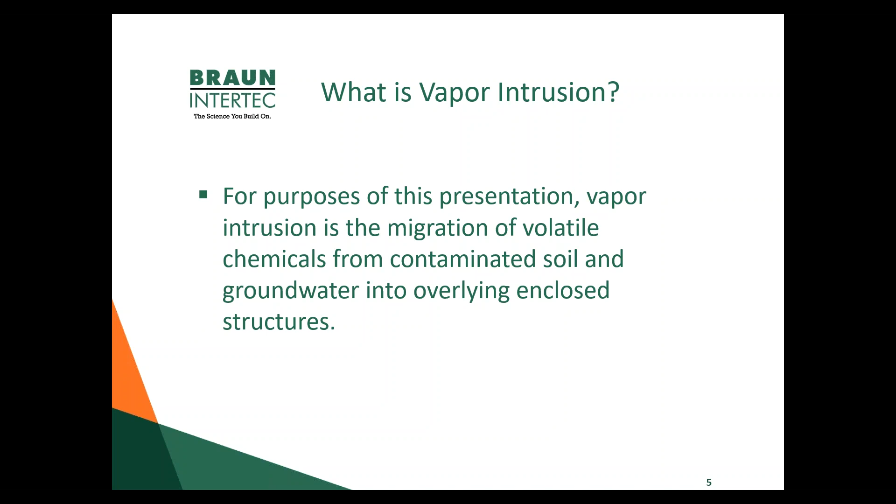So what chemicals are we concerned about? I'm going to call these the usual suspects. If you're involved with environmental consulting, you know these are the compounds that can be most problematic on many of our sites. BTEX compounds have been a thorn in our sides for decades, from leaking underground storage tank sites. Trichloroethylene, or TCE, is a very common degreasing solvent. We see it on a large percentage of our commercial and light industrial properties. With regard to vapor, TCE is particularly problematic because it is a carcinogen and has very low inhalation targets, so it's often a driver when it comes to mitigation requirements on vapor intrusion properties.

Tetrachloroethylene, PCE, or PERC, is a common dry cleaning solvent. Everyone's heard of that. Even though today dry cleaners are migrating away from PERC to more environmentally friendly solvents, we still have a legacy of thousands of historical dry cleaning facilities that used PERC in the 50s, 60s, 70s, and 80s. And we all know about projects where these types of releases from these small dry cleaners have created a lot of problems.

And then in addition to these larger quantity VOCs, we have all types of other cleaners such as carbon tetrachloride, methylene chloride, MEK, a paint stripper. These are found in a number of products and can be found in contaminated soil and water.

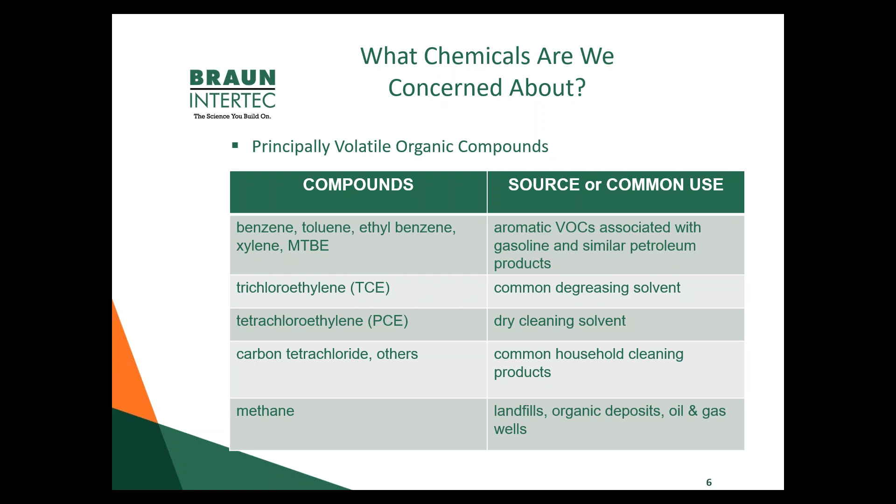And methane, which has been an issue for quite a long time, typically associated with landfill gas, but we have also had projects very recently where organics, for example, from a buried pond that was filled in were degraded, and the organics created sufficient methane to be a problem in an overlying proposed structure. And also oil and gas wells, improperly sealed oil and gas wells can allow methane from very deep strata to migrate up to the surface and affect overlying structures.

So a brief conceptual model for mechanisms of vapor intrusion. The source area is often contaminated soil, contaminated groundwater, sometimes separate phase product that we call NAPL. And the concept is that these volatiles will volatilize and rise up through the soil mass into an overlying structure, kind of like hot air. In reality, we know this is a simple model that helps us get our heads around what might be going on, but we know that in truth, it is much more complex.

There's lateral movement in the subsurface due to layering, sedimentation of soils, presence of impervious clay layers that might inhibit or push migration of volatiles off to the side, presence of cracks or fissures in desiccated clay layers, which are found commonly, and the presence of utility conduits, which are lateral or linear features that are often backfilled with pervious material and can allow VOCs to migrate great distances from source areas. So these are all complications in the vapor intrusion conundrum, and things that we have to deal with, and we'll be talking about a little bit.

So, Frank, sometimes these soil contaminants, the VOCs underneath - let's say when they were building those houses, you know, there may not have been a vapor intrusion when you have done a test and they say, hey, there's no vapor intrusion, and then all of a sudden, because it takes time for that vapor to come up, have you seen that? Sure, and contamination migrates, as we know. Groundwater can migrate, does not respect property boundaries, so it could migrate from an adjoining dry cleaner or gas station to the nearby residential neighborhood. So it might be something that could take years to migrate, and therefore you wouldn't know it. And typically for residential developments, you would not be testing for this type of issue. Typically only happens on commercial developments.

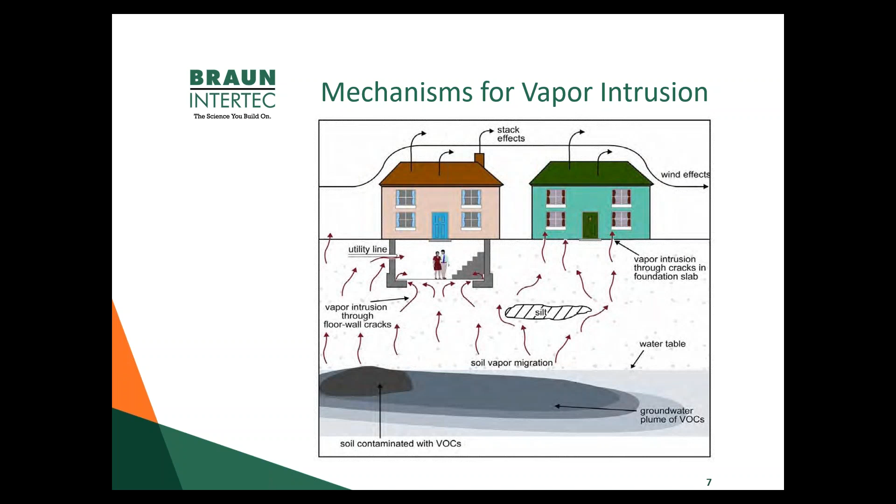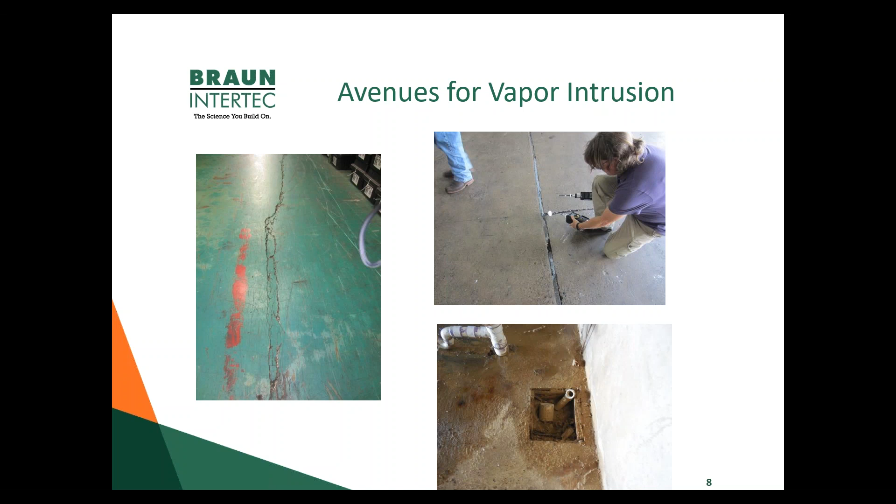Frank, this is Chris, and we recently did a test on a building with a smoke pen, and you can literally see the intrusion of air into the building space when the building HVAC systems are operational. Yeah, so it's very evident in some cases. That's a good example of a picture being worth 1,000 words - to physically see the smoke migrating into your space really tells the tale.

So why has vapor become such a big concern? If you think about typical contaminant investigations, we're looking at soil or groundwater, and we have to have a contaminant in a media and then an exposure route to a receptor. So in the case of a typical investigation, you have to drink or ingest contaminated groundwater, or you have to come into contact with contaminated soil, or perhaps inhale vapors or inhale dust from contaminated soil in order to have an exposure.

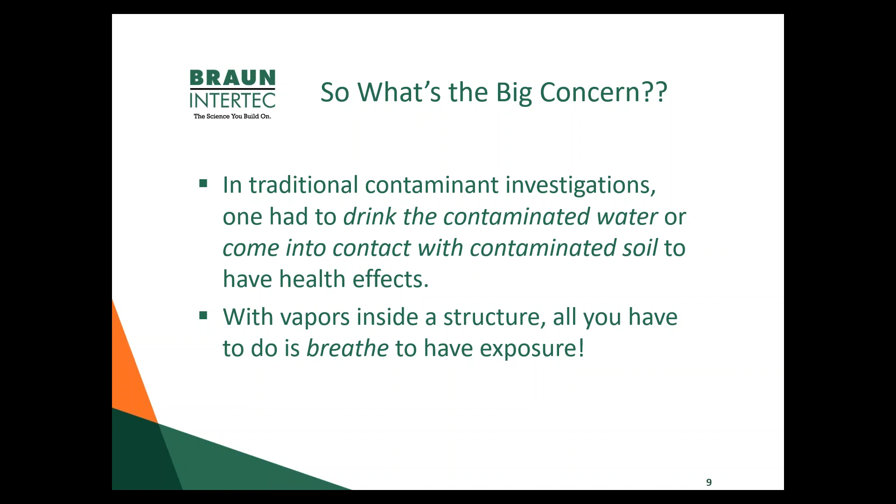So there's a process from the source to the receptor that must occur for there to be a risk. With vapors, we have a unique situation: if there are vapors within a structure, and you are breathing—which we all do many times per minute—then the exposure route is complete. So it's an immediate exposure route, and can be really problematic because of the ingestion of volatiles into your lungs. Yikes. So what are some of the difficulties?

I'm not going to go through these bullets one by one, but there's lots of variation in subsurface conditions, which is a problem we deal with on all types of subsurface projects, geotechnical or environmental. The nature of the contamination will vary—what chemical is it, how concentrated, how deep is it in the soil, what's the stratigraphy, et cetera.

Another factor is that buildings are constructed using a wide variety of protocols depending on when they were built and for what purpose. A building built in 1950 wouldn't have the airtight concerns we have in LEED-qualified buildings in 2020, which are often airtight and built to keep HVAC costs low. All of those factors associated with different building types will dramatically affect the opportunity for vapors to enter the structure.

And then we have preferential pathways, which are a real troublesome aspect of many of these sites—small linear features, like sand used during backfilling or installation of shallow utility trenches, that can become pathways for vapor to enter a structure.

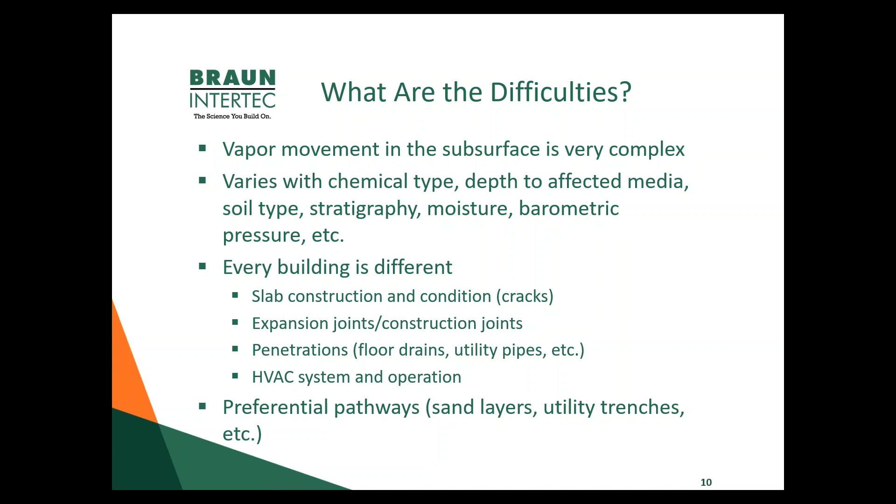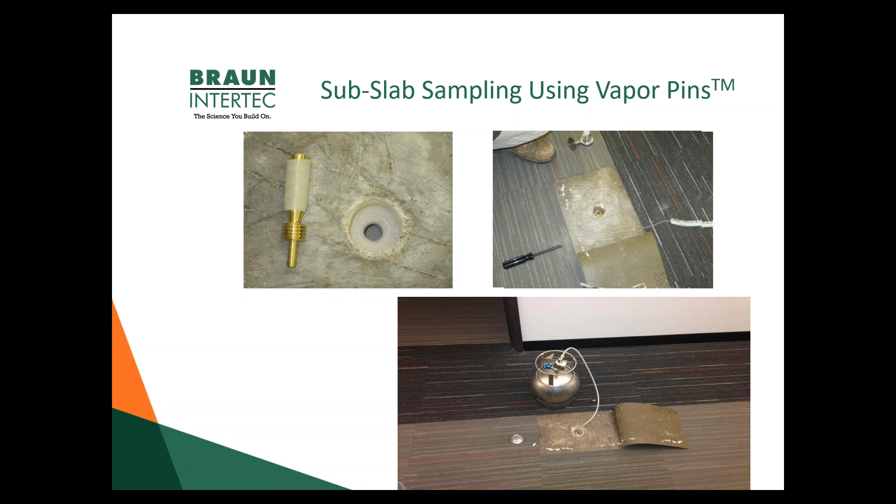The beauty of this installation is it's very low disruption to the tenant. We just pull back a carpet tile, drill a hole, put in our pin, add a flush cover, and flap the carpet tile back down—no one even knows we've been there. So for occupied buildings, there's a mechanism to get sub-slab vapor samples without disrupting the business or tenant, which is a big deal for some clients.

Going from sub-slab to indoor air—once there's a potential for vapor intrusion, indoor air sampling is a logical next step, and gives the best indicator of whether volatiles are entering at problematic levels. We can compare those indoor air levels to criteria established by state or regulatory authorities.

We have to be careful that indoor air sampling can vary seasonally and due to many variables—atmospheric pressure, even over the course of a day. Studies have shown concentrations of TCE, for example, varied by a factor of 5 over just half a day using continuous air monitoring. So a lot of things can complicate our assessment of vapor, and background issues also come into play.

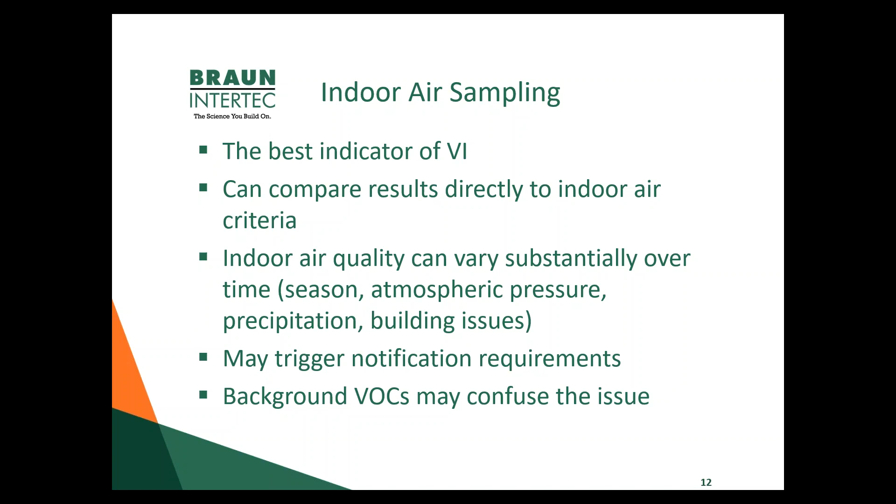If we go to the next slide, we'll show some sources of contamination. We probably all have a closet in our laundry room or garage like the one in the upper left, filled with chemicals for routine cleaning—pesticides, cleaners, aerosols. Many contain VOCs that can result in detectable concentrations in ambient air. For dry cleaning, multiple studies have shown that recently dry-cleaned material in a single family house will result in detection of dry cleaning solvents in the air.

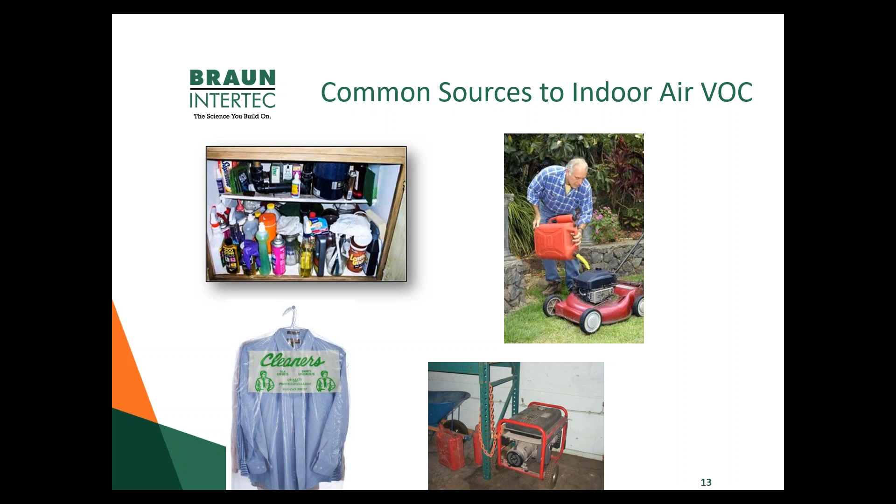And then gasoline used for lawnmowers or generators—studies have shown that even a gasoline can sitting in a garage adjacent to a single family structure results in evidence of BTEX within the air in that home. So all complicating factors that make the job just a little more challenging.

Yikes. So now I think we have a quick poll that's kind of fun to see what people's thoughts are regarding vapor. What percent of the time would you expect to find potentially harmful VOCs in a structure? This would be just detectable concentrations, not above any regulatory threshold, but just detectable by lab analysis: 10%, 25, 60, or 80. So I think—have we launched the poll? Okay.

And while people are voting, I thought I'd point out those slides you showed are somewhat applicable to single family homes, but in reality, commercial and industrial facilities all have this very similar potential of indoor VOCs. Absolutely, yes.

10% of our audience said it was 10%. We had 33% say it was 25%. 38% said it was 60%. And 19% said 80%. Oh, all not right. Too bad.

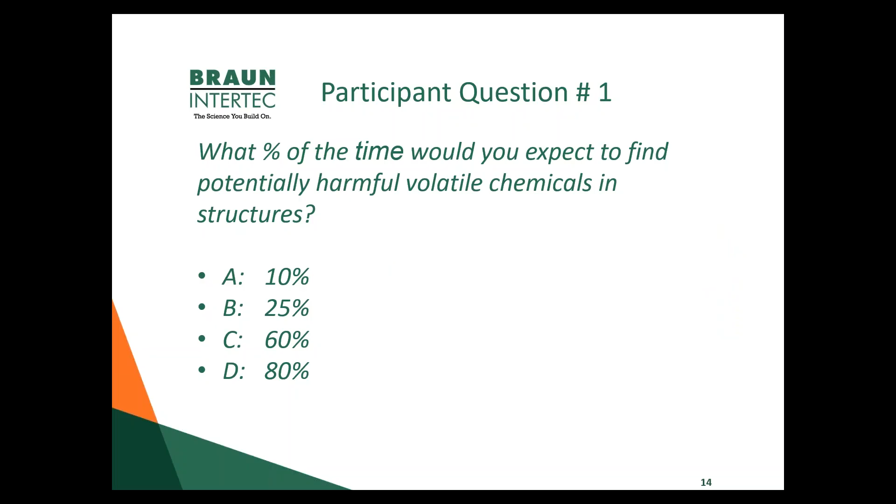Well, here's the results of some studies. If we go to the next slide, this is my last slide. EPA did a study and reviewed 18 indoor air studies across many states. This is a while ago, but still, I think, applicable. They found that over 80% of the studies reported the presence of BTEX in indoor air, whether that was from an actual vapor intrusion issue or due to ambient contamination. I'm not sure they concluded, but that is a surprisingly large percentage.

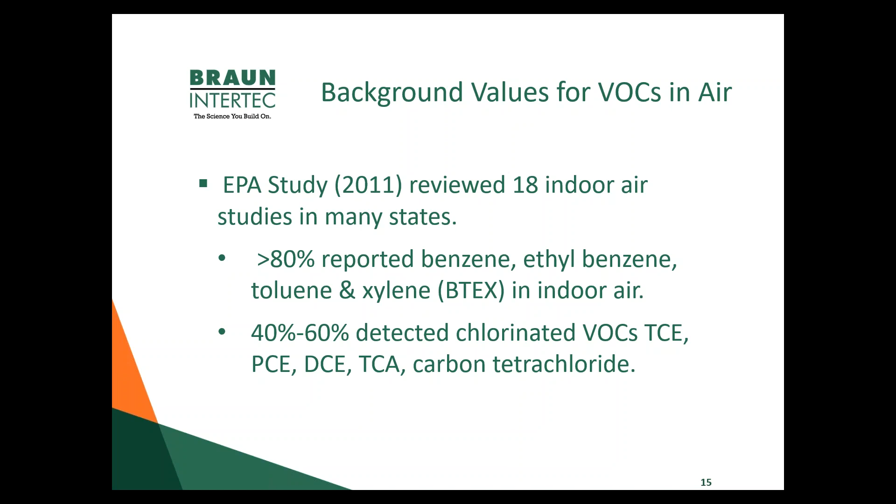So kind of amazing, and 40 to 60% detected one of the chlorinated VOCs in indoor air. Again, a very large percent. So when we're doing vapor studies, we need to consider background concentrations as part of the process. So with that, I'm going to turn it over to Chris, who is going to share some of his experiences and discuss the challenges associated with mitigation design for vapor intrusion.

All right, well, thanks, Frank. So what I want to cover is an overview of mitigation alternatives that exist out there, discuss a little bit about the design and construction process for mitigation, and just show some information about the components of mitigation alternatives, and in that process provide some lessons learned that we've found over the years.

And I start out with this slide, remediation versus mitigation, partly because people mix up the terms and get confused by what they might be required to do. As a responsible party to a contaminated site, you may be required to remediate the source of VOCs, and in the process you may also need to have some mitigation of the building. Typically you can do both at once with the same system. We have that kind of systems in place.

But as a voluntary party or neighbor to a contaminated site, which now has migrating vapors onto your site, you may just be mitigating. Mitigating means you're just trying to cut off that exposure route in the sub-slab area of your building, or even to the sides of a basement of your structure. Again, cut off the potential for that intrusion, maybe blocking utility corridors, or putting in some other type of mitigation system.

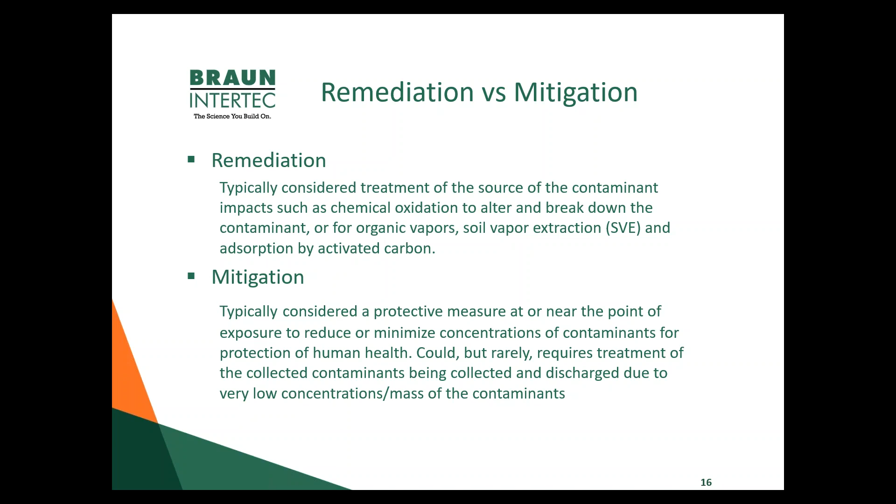So next slide. Depending on what regulatory program you are in, what state you're in, and so forth, generally there are 5 main mitigation alternatives that you may have a selection of. There are variations on these, but generally they're a passive barrier system, maybe an active subslab depressurization, or an active subslab ventilation system, and there's a minor difference there.

Other things that have been looked at are trying to modify your building, pressurize it to reverse the potential for intrusion to occur, or repairing your floor, filling those cracks that Frank showed earlier, and blocking utility entries into the building. As I indicated in last month's blog about vapor intrusion, those two steps can prove to be quite difficult. So I'm going to focus today mainly on those top 3, and for the most part talk about commercial and industrial buildings, but they very well apply to other types of structures, especially multifamily housing, maybe mixed commercial and housing, which there's a lot of these days.

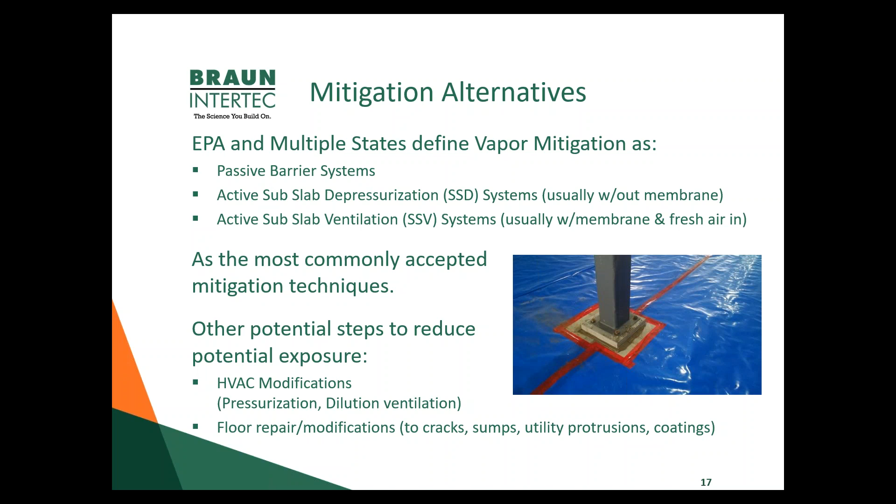So the idea behind those three main alternatives, as I show here, is a passive barrier system just to block that exposure route. You're not trying to collect the vapors that are below or to the side of that building, but you just have this physical barrier through which those chemicals can't pass.

You can think of it like a vapor or water barrier, which sometimes are used and called out in building codes for buildings. But I would point out that a vapor barrier called out in a building code in an occupied portion of a building usually is a very thin plastic membrane, maybe 6 mil thickness, and doesn't typically work.

Depressurization system versus ventilation system - generally the difference is that a subslab ventilation system has added to the design a permeable ventilator, also allowing fresh air into that system. We'll get into that in a bit, but other than that, they're both active systems, essentially pumping air from beneath the structure and sometimes to the sides and discharging that air to the outside.

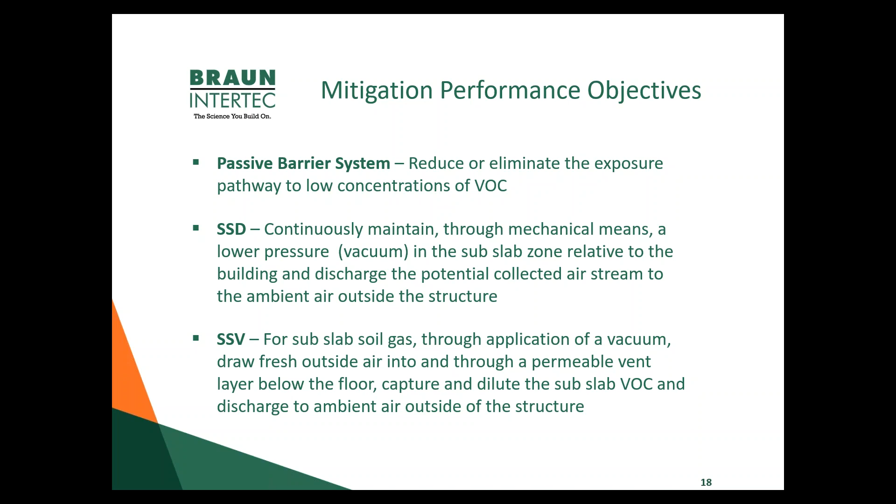I'd point out that in the state of Minnesota recently, now part of a guidance document in the state, another alternative is the addition of a parking structure for vapor mitigation. In the past, it was assumed to be a valid alternative - you've got an underground parking structure, that's going to block the vapors from getting into the office or apartments or condos above. It was found, however, that is not the case. So parking structures now with certain design and construction modifications are allowed.

We're very familiar with this because we here at Braun actually developed this document and did quite a bit of research, and we had some principal architects on staff very familiar with how buildings are sort of living, breathing organisms, if you will. So I just point that out - that's somewhat of a variation on vapor mitigation alternatives.

So once you're in a scenario where you know you need to mitigate, and different states have different requirements for going through the testing, as Frank was pointing out, you're really designing a system to be incorporated into some kind of building or structure, and you need to get that system thought through, designed, and constructed so it operates as planned. Whether you think it through on a focused feasibility study or not, you're usually going through all of these issues in some form.

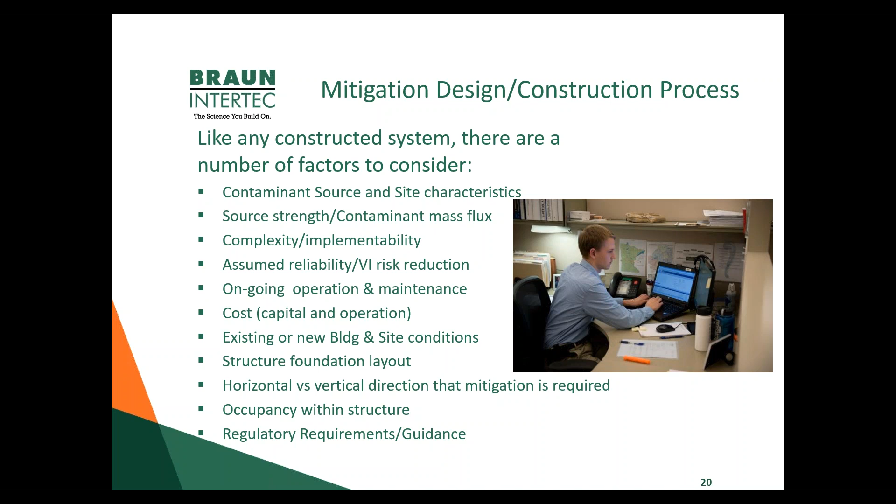But you go through this process and come up with a plan for mitigation - it may be just a barrier membrane, a depressurization system, or a ventilation system. Again, certain regulatory programs don't allow just a straight vapor barrier membrane. Here in Minnesota, for instance, as a standalone mitigation alternative, those aren't allowed.

Overall, the whole design and construction process is there to make sure you're selecting what's appropriate as an alternative, that you're designing and constructing it so that in the end, when you have to test that system or operate and monitor it, it's working as hoped. Depending on the system, this may be a very minimal effort, but it can be much more complicated, with many pages of engineering plans and specifications laid out, and a construction contract for the contractor or contractors building this.

In many locations, you have one contractor placing piping beneath the floor and a plumber doing any plumbing of piping above the floor, having to do with union rules and who can do what.

So the overall process, if you will, is to come up with a basis of design. What are you trying to do? What should this system look like? How are you going to construct it? How are you going to test it? It's permitting requirements and long-term reporting.

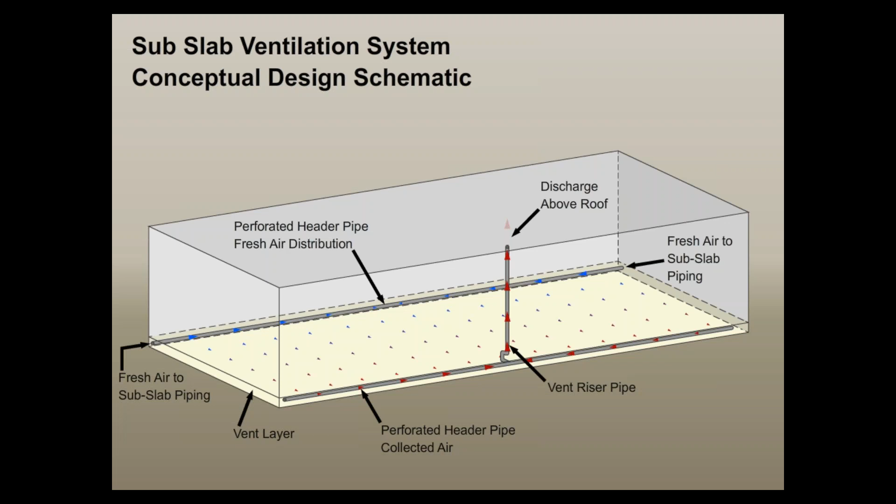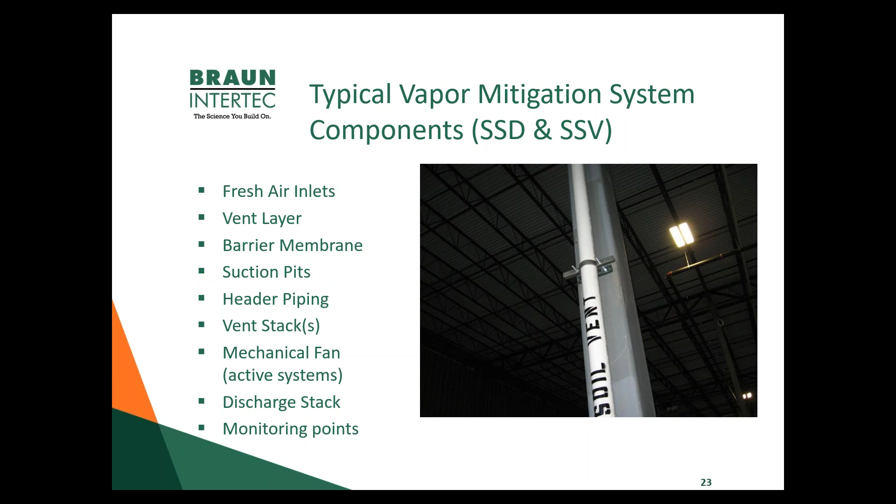There are a lot of components to a depressurization or ventilation system, and it's the design and construction of those things that makes a system successful. That's where we've learned lessons over the years about what works and what doesn't. I listed all these components, not in any particular order of importance, but I'll go through some photographs of these systems and point out some issues and lessons learned.

There are sprayed-on membranes and rolled membranes. Typically the rolled membranes are 15 or 20 mil thick, and a spray-on membrane might be closer to 60 mil thick. This could be a passive barrier in a building, and we can do this in existing buildings or new buildings. Existing buildings, however, is a fairly unique situation where that happens.

But we've been involved in a couple of cases where that has happened, where the entirety of the floor of the building was being taken up. In the case I'm thinking of, they were lowering the basement floor to create greater headspace in that basement room, so we were able to put a membrane in after the floor was removed.

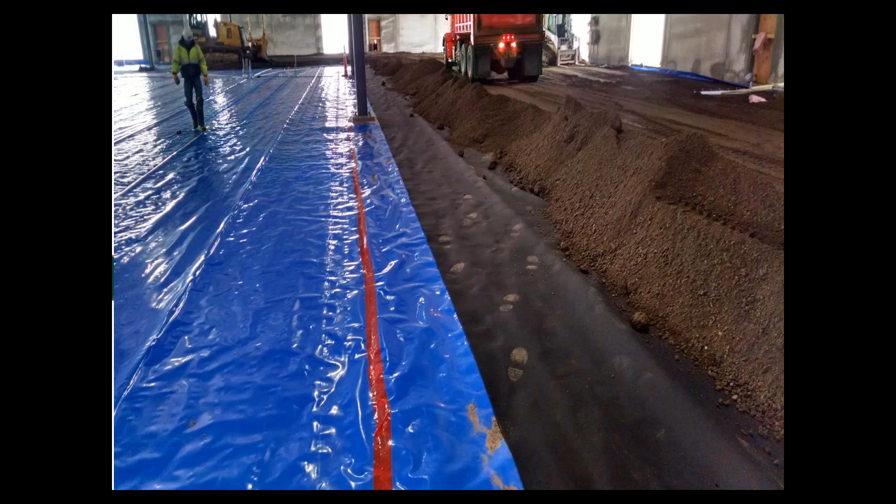The next slide shows the same kind of setup, with the sealing of the membrane. In this case, there's a textile felt material being placed over the membrane because the aggregate base for the new floor of the building is being placed right over the membrane.

We've done some tests and found that aggregate base, because of the sharp rocks—in Minnesota we call it Class 5, in Illinois it's CA6, an aggregate base that goes by different names coming from Department of Transportation terminology—can damage the membrane. So we put that geotextile material over it as a protective layer. You'll notice a guy walking on the membrane, but the trucks aren't driving on it.

One of the big things through that whole design and construction process that we've gotten pretty good at is meeting with the developer, general contractor, and subcontractors to make sure they're not driving on the membrane or over where the piping might be. We've had to go back by hand, dig up and repair piping that guys were just driving over because nobody ever told them they couldn't. It's amazing what people do if you don't communicate up front.

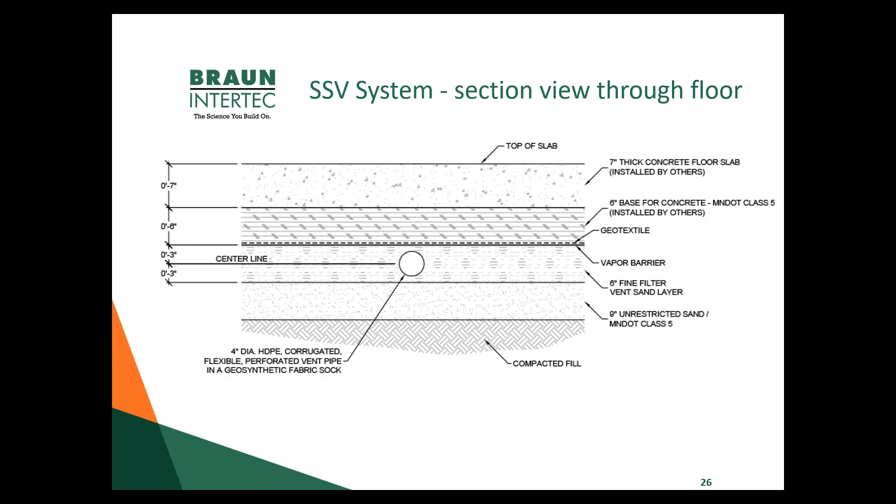Next slide. In many cases we don't have the luxury of building things up, and this was a site in California where the client did not want to expend the cost of bringing more soils in. So we went to a very thin vent layer and a flat pipe. If you don't know what a flat pipe is, it's typically about an inch thick and about 12 inches wide, and you can convey a lot of fluid through that pipe—that could be water or air. The flat pipe isn't everywhere under the floor, it's just like the round pipes you've seen. The air is conveyed through the vent sand into the pipe, which is under vacuum on its way out.

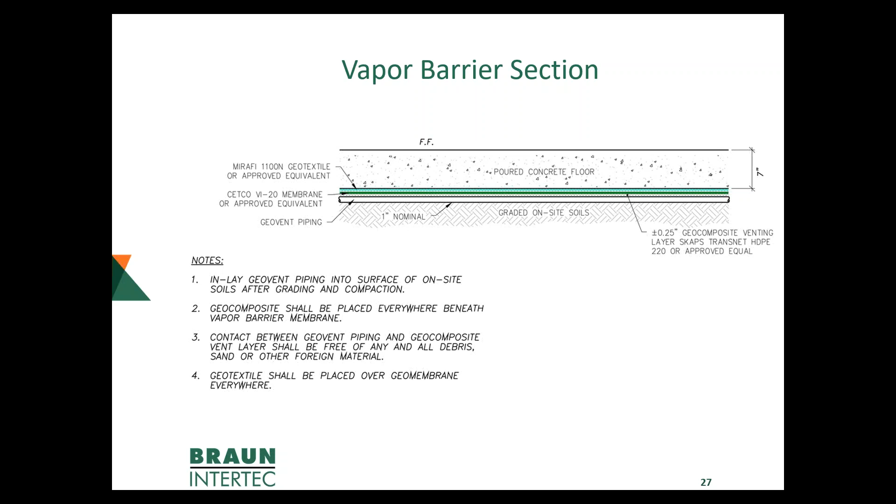So different buildings, different setups have different needs. One of the things we've learned is, if we can, we want to put the membrane where we have vent systems as deep as we can below the finished floor elevation of the building. One reason is that as building use changes, there may be tenant improvements where they're moving plumbing piping around, and for at-grade buildings that means digging down a couple of feet. So where we can, we want to keep the membrane and that piping two-plus feet below the finished floor elevation. It can really be helpful in the long run as building use changes.

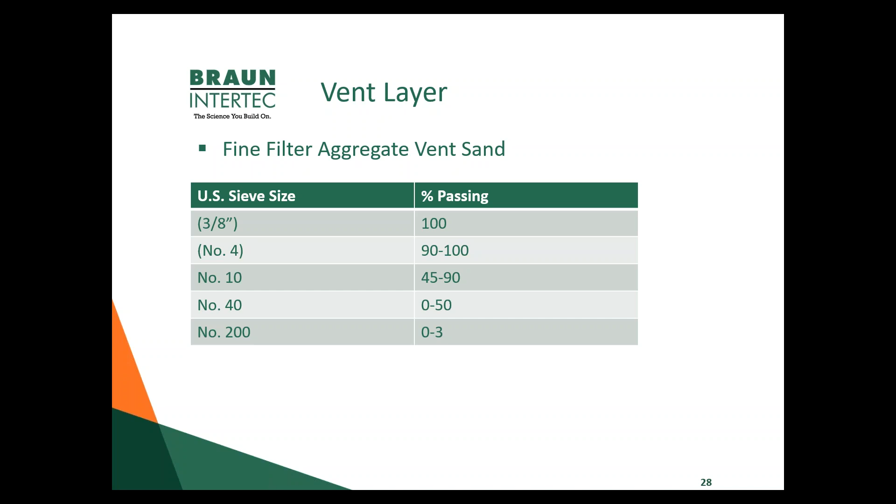So next slide. That vent layer—here's a typical grain size distribution based on what are called US sieve sizes. That lower number 200 sieve, that's material with a very small diameter, and we want a minimal amount of material able to pass that sieve. That's why those numbers are so low. That generally describes a fine filter aggregate, and we find that works very well. It's somewhat counterintuitive when someone says, well, you should use a pea rock.

This was a case where we were being brought in as a third party to review things on behalf of a tenant that was going to move into this building, and they actually were eventually going to buy it.

So we were documenting issues as things were happening, and we couldn't change things, but we could point them out. Other issues came up that go back to the design process. There was no sleeve on that pipe. The vent sand and the holes in the piping weren't compared to understand that there may be a problem.

The contractor, instead of having a 6-inch vent layer, thinned out the layer in some areas due to other construction issues, such that there was hardly any vent layer there. The vent layer acts like a pipe - it needs to convey the fluid to the air, so it needs a certain capacity.

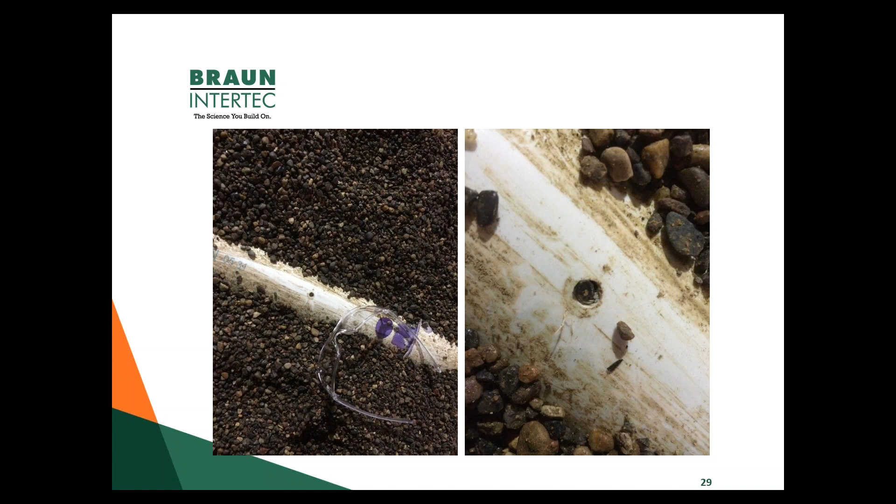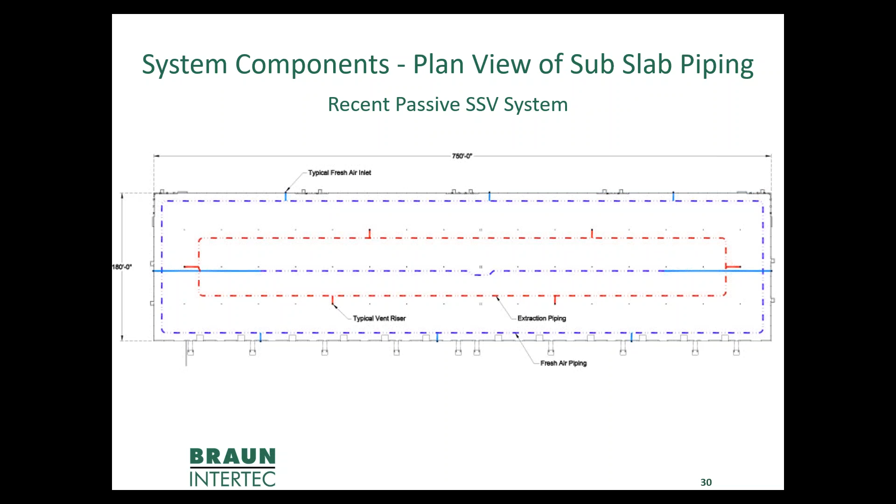I bring this up because it's a passive system, and while it's not allowed here in Minnesota, it actually works. It exchanges the air on a fairly regular basis, based on wind, thermal gradients, and wind across the roof of the building. You get a vacuum everywhere in the building, you get airflow, and it very much can work. Next slide.

One thing we've learned is we want as much symmetry as possible in these systems. It's especially true for ventilation systems; for pressurization systems, depending on how you plumb those things, it can be very true also. There's less piping than the passive system. Another thing we've learned is the cost of all of those vent risers to the roof of that building for the passive system gets pretty great - you have the materials and the construction and so forth.

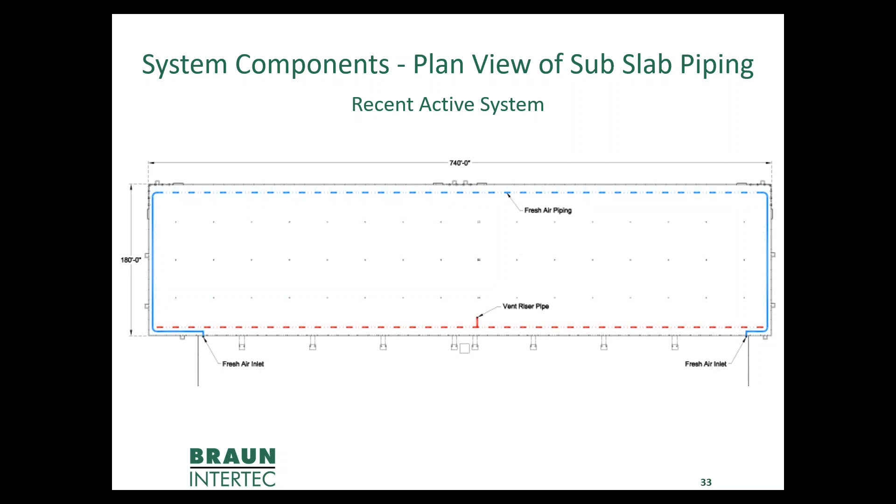Another thing we've learned is we've been monitoring the pressure loss, the head loss of flow of the air through the vent sand. And we have found that we can draw air from one side of the building all the way to the other side and get, one, sufficient flow, two, sufficient vacuum, even though now in the state of Minnesota, one of the metrics for monitoring a sub-slab ventilation system, we just have to show there's flow. We don't have to show there's vacuum. Not quite sure how it ended up that way for recent guidance that they published, but that's the case. But we know that we can get that at least minimum and quite a bit more than that.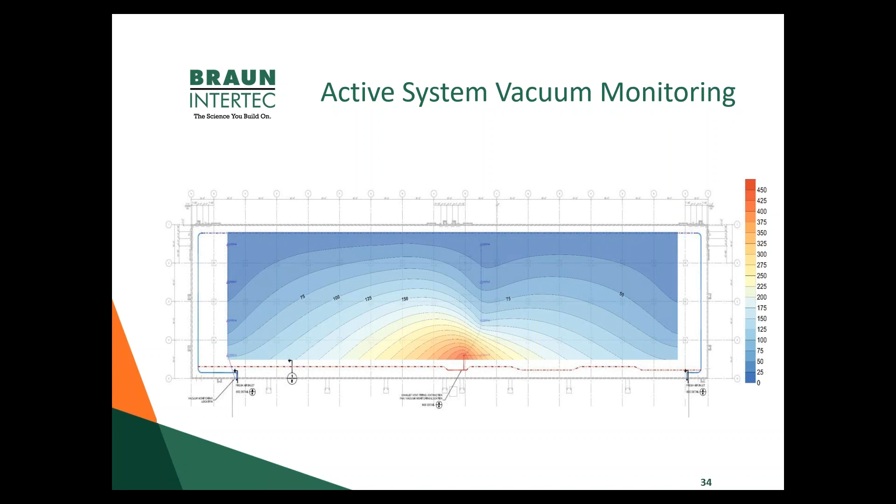Next slide. Same thing here, we show a monitoring of that, the red being high vacuum, the shading to blue being lower vacuums. Again, we're allowing fresh air in on the truck dock side of the building, hard piping it all the way around to the other side. That's just so we have hardly any evidence that the system is there. Next slide.

This is a sub-slab depressurization system at a site we're peripherally involved in. There's 30-some extraction points, and they're all plumbed at 3 separate blowers. For some of those systems, one thing I wanted to point out for a depressurization system and other systems, you typically are going through pre-mitigation testing, a pilot test of some kind. How much vacuum can we get? How far will it extend away from that point where we are extracting air and applying a vacuum?

One thing to really make sure of when you're doing that is that all the other systems that may be in a building, this is especially true for existing buildings, the heating, ventilating and air conditioning system, maybe some other kind of makeup air or exhaust air systems, make sure those things are on. We did have a site at one point where the pre-mitigation testing showed one thing, the system was installed, there were some renovations going on in the building, a new HVAC system was installed, some other exhaust. All of a sudden, the depressurization system was not sufficient to get to the operational metrics that were needed. Additional points had to be put in, and I think a larger fan had to be put in. So again, a lesson learned.

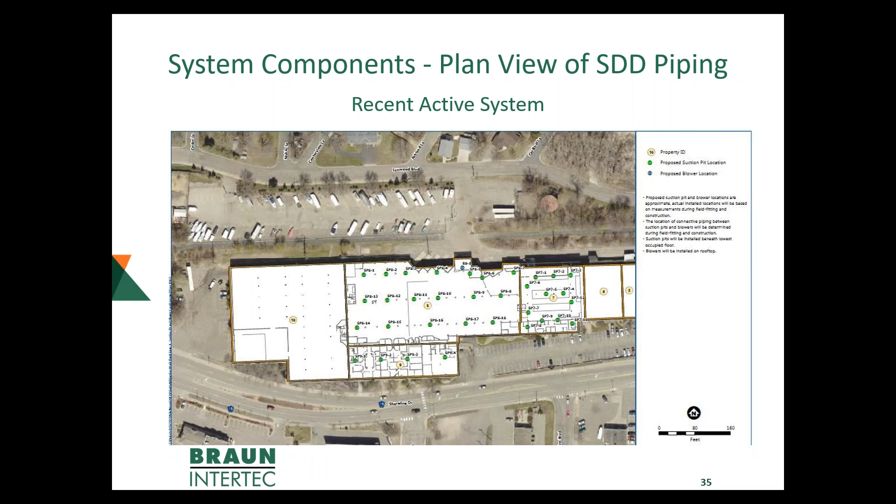Next slide. So these are just some pictures showing some engineering drawings, if you will, taking the building construction drawings from the architect and the engineer. For those of you in southern states, you may be saying, why is that footing down so low? We have frost depth footings. This was a site in Minnesota. And so this was a case of a truck dock. There's pavement down there 4 feet below the finished floor elevation, and then the footing another 48 inches or so below that. So again, trying to not have evidence of our systems.

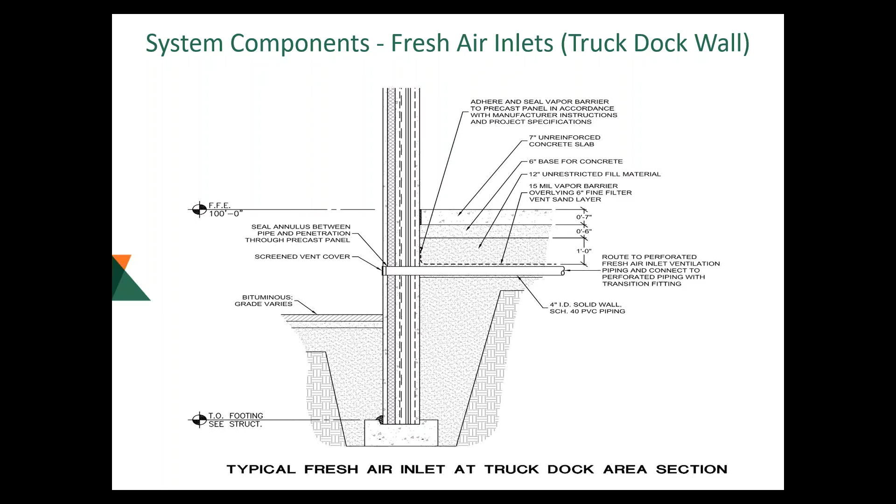There's the screened vent cover on the fresh air inlet. If you go to the next picture, here's a picture of what that might look like on the outside of the building. Next picture.

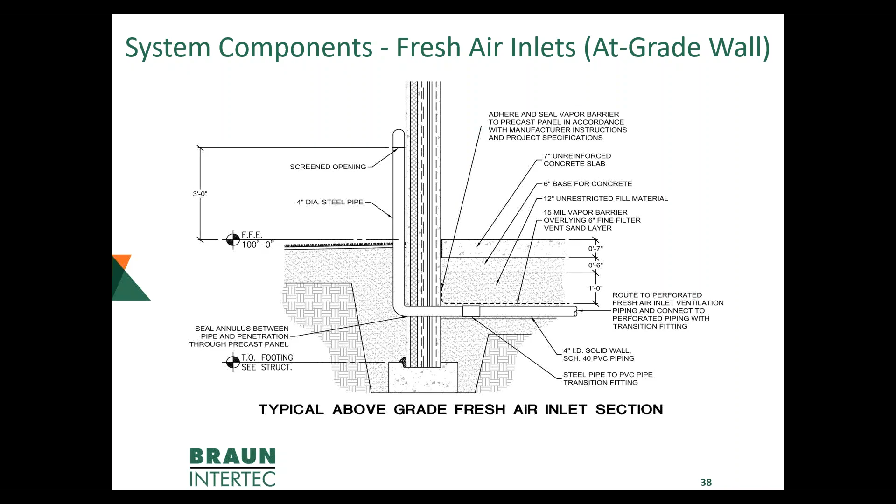Same thing with a fresh air inlet where we need to have it. It's going to be an at-grade wall, and the next picture shows what that might look like in a green space. At one point we had PVC pipes; this one is steel. Where there's lawn right up against the building, lawnmowers run into the downpipe, so we went from PVC to steel.

Whether you've got an SSD or an SSV system, you typically have riser pipes up a column in a building, up a wall, or a pipe chase, and you've got to get that pipe up, typically to the roof, though not always. A couple things to point out: this was a project where we were keeping everything a little lower. During construction, that pipe might be left open for a while, and you wouldn't believe what contractors throw in that pipe as they're walking along - cigarette butts, rags, you name it. So you need to protect these things, and again it comes back to planning and communication.

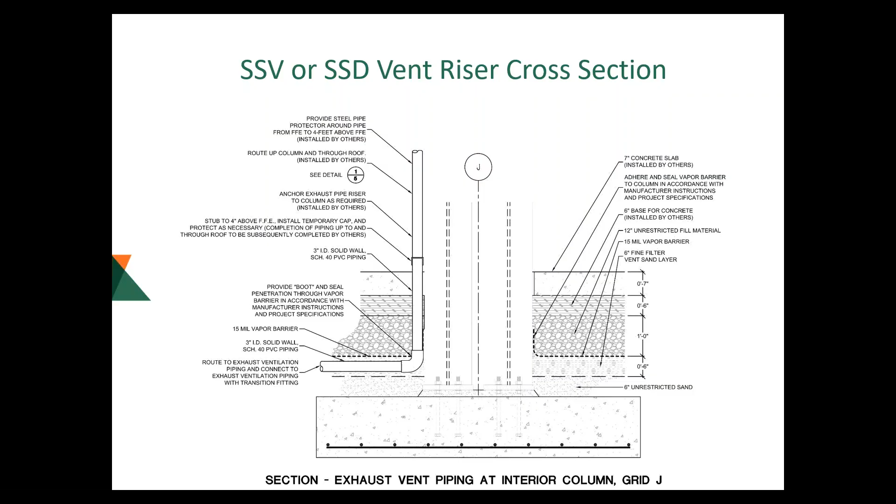Here's what it might look like. This was a brand new warehouse building, and we're rising up next to a column. Depending on the clearance between the floor, the piping, and the membrane, those interior columns sometimes need to be lowered. In this building I think we lowered - actually no, this was the passive system - we ended up lowering 9 of those columns to allow the piping to come across to the column and rise up right next to that box girder.

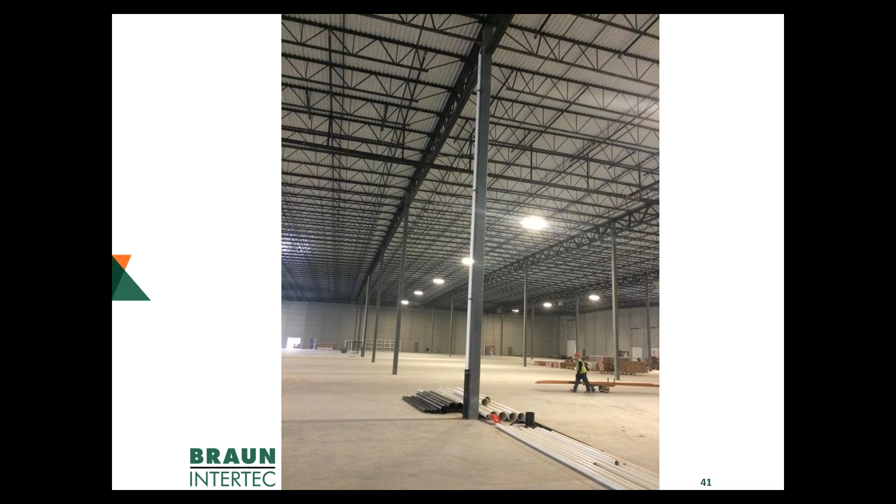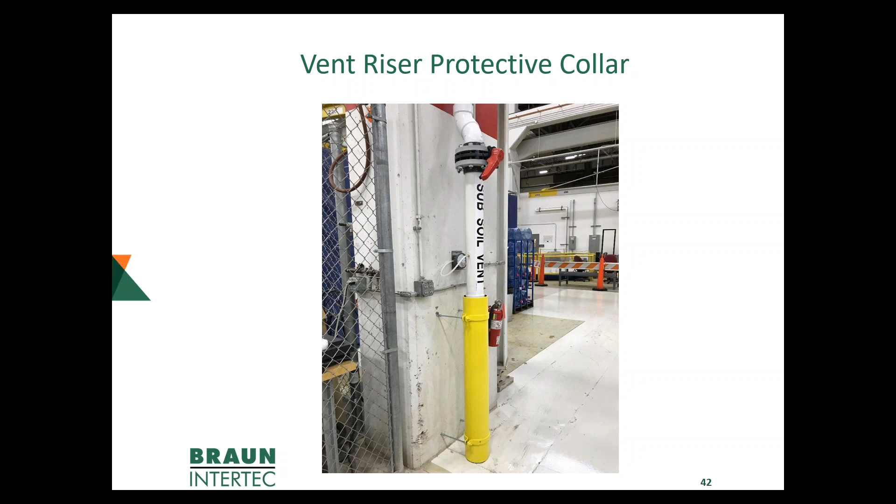The thing we find out - you couldn't see it in the last picture, and this is a different site - is that we need to protect those pipes, typically PVC, in this case protected with a steel collar. Fork truck drivers see these things and they want to hook them. I don't know why, but they seem to.

So up on the roof of the building, you might have a rotary roof vent for a passive system. We found in cold climates that's not such a good idea because these are not very robust, and the humid air from below the building will form condensate and freeze up. That can be a big problem when the system doesn't work.

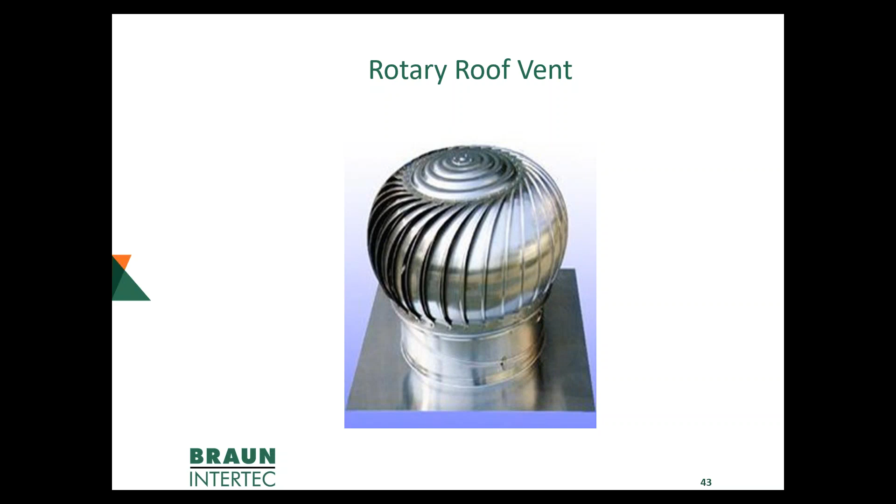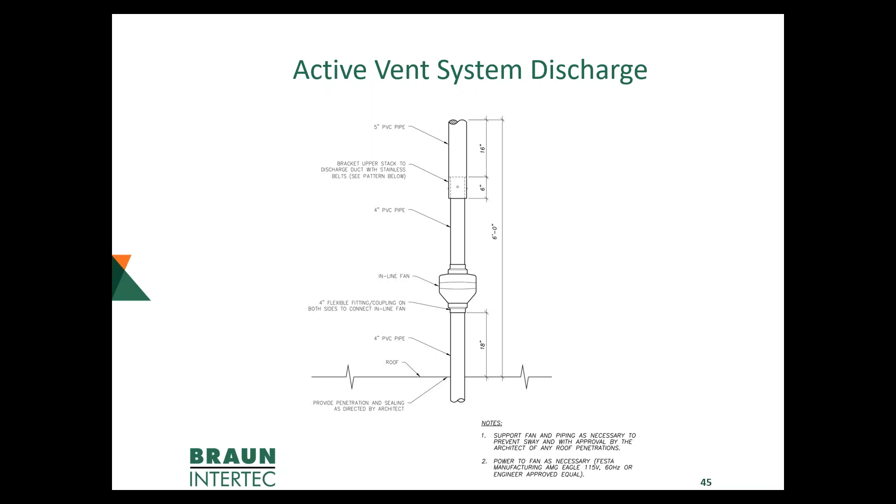This again is an active vent system - it says active, but it could be an SSV system - and there's a radon style fan there. Some of these systems are very similar to a radon system. In this case we're putting that no-loss stack on there, which is a very prescribed design because it keeps the rain out as long as the airflow velocities have a certain minimum velocity. People have tried other ways to keep rain out - other types of caps, angled piping, and so forth - but this works, and the reason it works is because rain doesn't fall straight down, it's always falling at an angle.

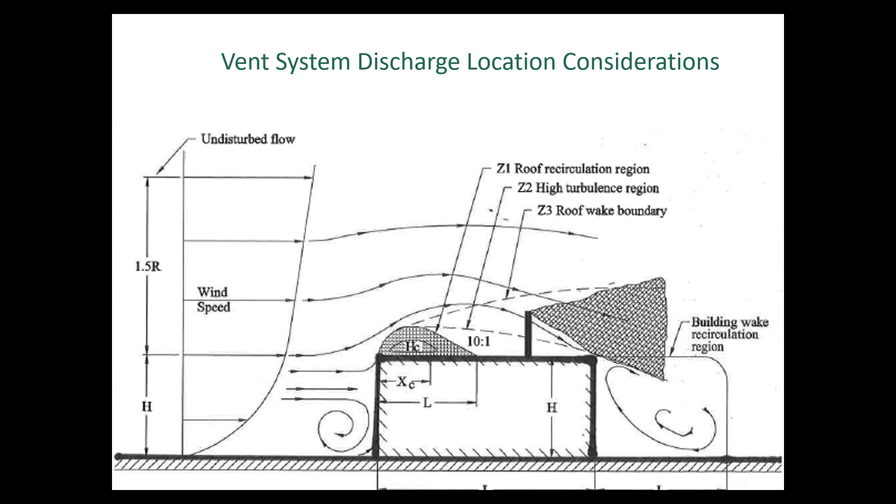Here's a little nomograph that one goes through to figure out where your discharge stack outlet should be so that it doesn't get entrained into doorways, windows, or fresh air inlets. It looks a little complicated, but you work through it to figure out at what height it should be, because this is a source of VOCs. They're very dilute, but they are a source of VOCs, which eventually get broken down under the influence of the sun's rays.

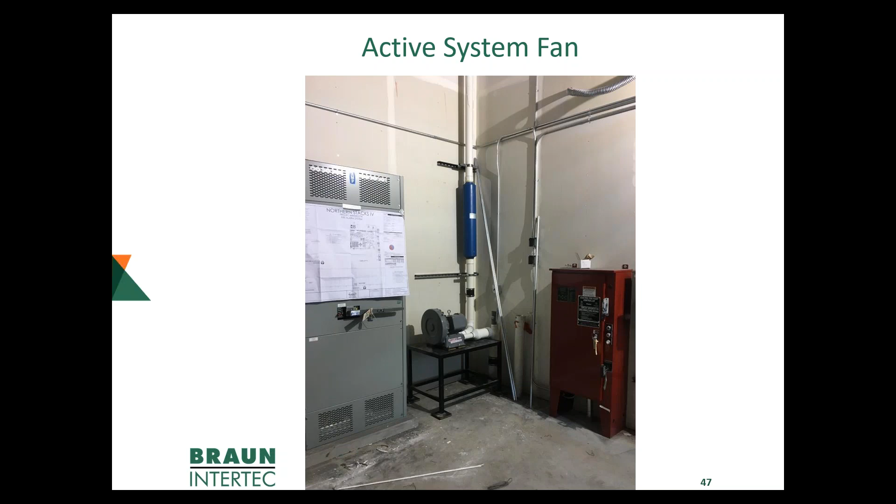My last slide is a system providing mitigation in a large industrial building, about 200,000 square feet plus. It's partial building mitigation, so the rest of the building is about 500,000 square feet. This is a 10 horsepower blower providing mitigation - really a sub-slab depressurization system with no fresh air in. I needed a 10 horsepower blower to do that, versus the other one where I was using a fractional horsepower blower. So it just shows you the benefit of allowing fresh air in, because it generally allows for less energy input to get the air.

So that's my presentation and a few items of lessons learned.

Chris, I have to say you win the award for going through the most slides with the best timing ever. That was amazing, great job. Oh, I planned it down to the second. You nailed it. Of course. Congratulations, we're engineers, that's what we do. And I'm sure everybody's getting hungry, so I don't know if we have any questions.

I think we do have one question actually, so we have time for one question. Someone from the audience asks: are air permits required for the potential VOCs being discharged from active venting systems?

I've had situations where we've gone through the process of looking at air emissions, the mass emissions, only to find that we don't have the mass emissions that would require it, or we can dial down the system so that we won't have the mass emissions that require it. I have to tell you, in the city of Minneapolis - and I could be wrong, somebody in the audience will probably correct me - I think you need it for an active system in Minneapolis, or you used to. It's been a while since I've done one in the city of Minneapolis proper, and there are probably cities that do have that requirement. Again, the emissions of a mitigation system are usually quite low from a mass standpoint, if you were to calculate how much is being emitted over the course of a year or whatever.